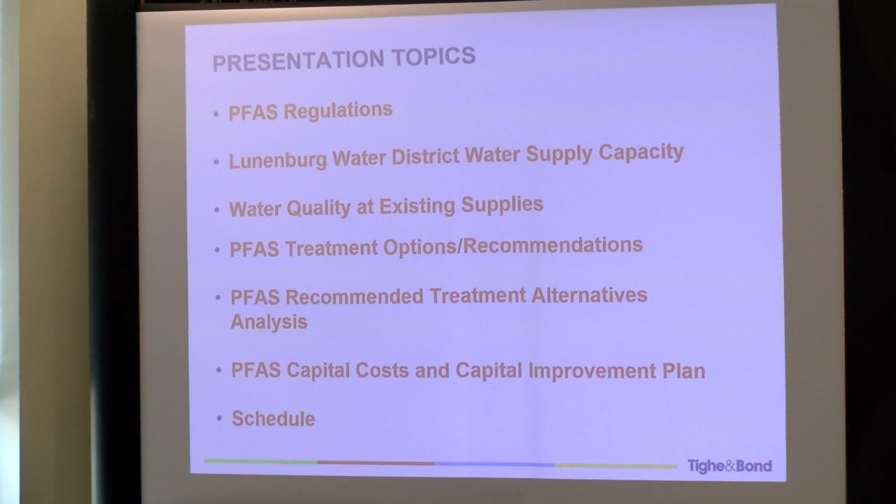So part of this presentation, we're going to just briefly touch upon a couple of these topics. The emerging PFAS regulations, what's going on with the district's water quality, capacity and water quality of each of their supplies, review the different options available for PFAS treatment, some recommendations for PFAS treatment. We'll go through our treatment alternatives analysis, and at the end we'll have the capital costs and the recommended plan and a potential draft schedule.

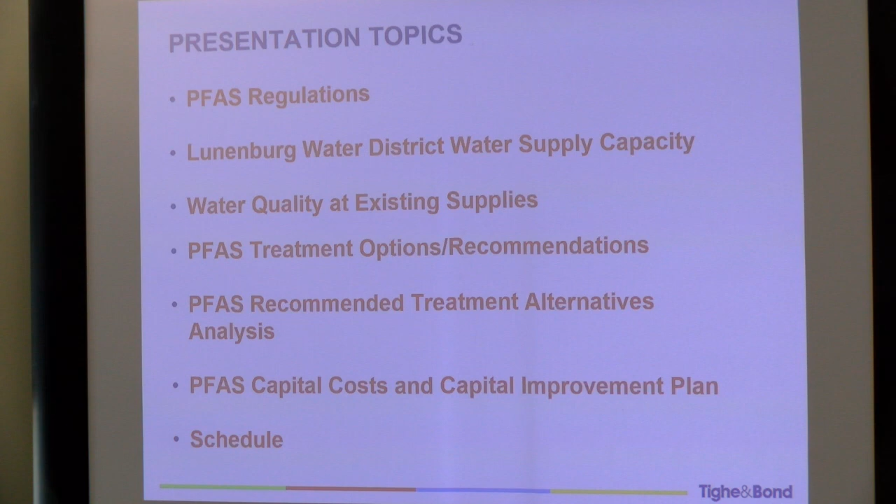So PFAS in drinking water, what is it? It's an acronym. It stands for a family of chemicals, thousands and thousands of different chemicals. Recently, the US EPA has enacted draft legislation that would establish an MCL for various individual compounds. The highlights are PFOA and PFOS in the middle of the table there, establishing a 4 parts per trillion limit, which is a very low limit.

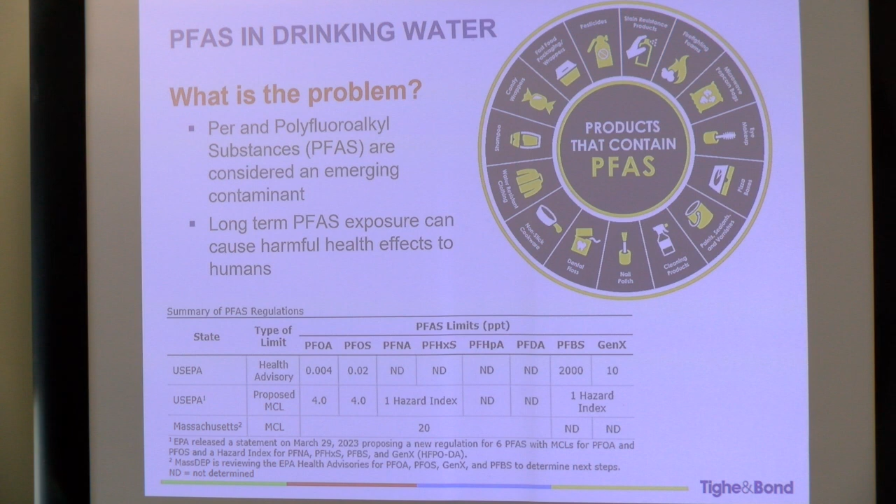Currently, Massachusetts has a limit of 20 parts per trillion, and that's for a combination of the different compounds above that number 20. So if the federal MCL gets finalized, PFOS and PFOA would have individual limits of 4, which is important for the district to pay attention to.

Just a brief history of what's going on in the district. It was established in 1939. It currently has 6 water supply wells, 4 of which are located at Lancaster Avenue of varying capacities, which we'll go into a little bit later on. There's the Hickory Hills well, and then the Keating well, which is their largest source. There's over 50 miles of main distribution system throughout the district, ranging in diameter from 4 inches to 16 inches. Approximately 2,500 customers. Estimated population served is around 7,100.

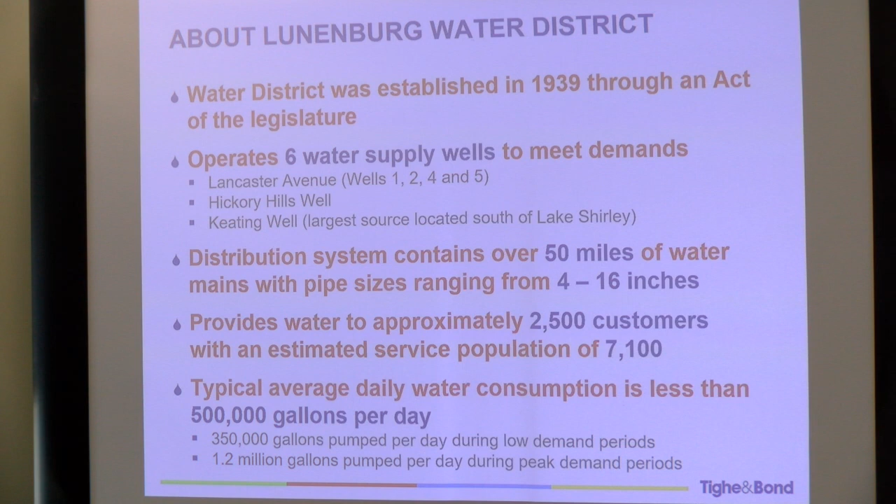On average, the district uses 500,000 gallons a day. That can be lower in the winters, 350,000 gallons, or during the summer's high demand periods, it can go up to 1.2 million gallons a day. The district operates under a Water Management Act permit, which establishes an average usage of 540,000 gallons per day, 0.54 million gallons. So you can go above this, but on the average for the whole year, the permit is 0.54. That can be increased, but there's a permitting process that establishes the need and the mitigation to increase that amount.

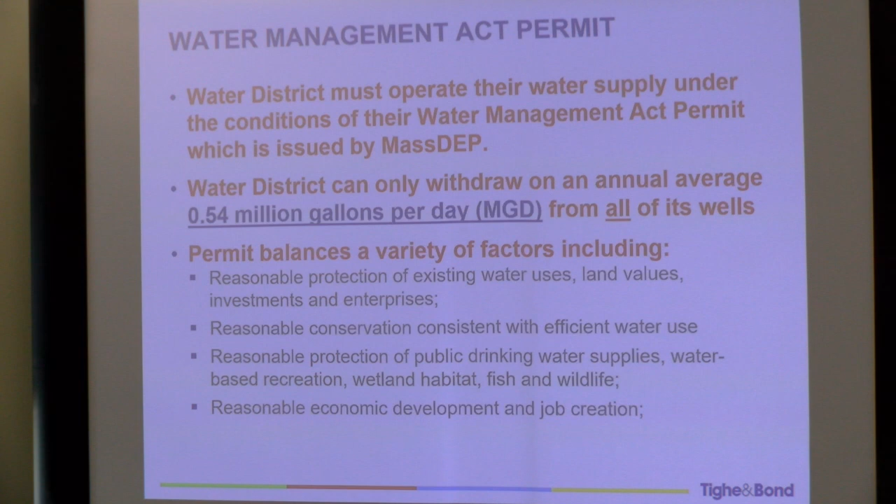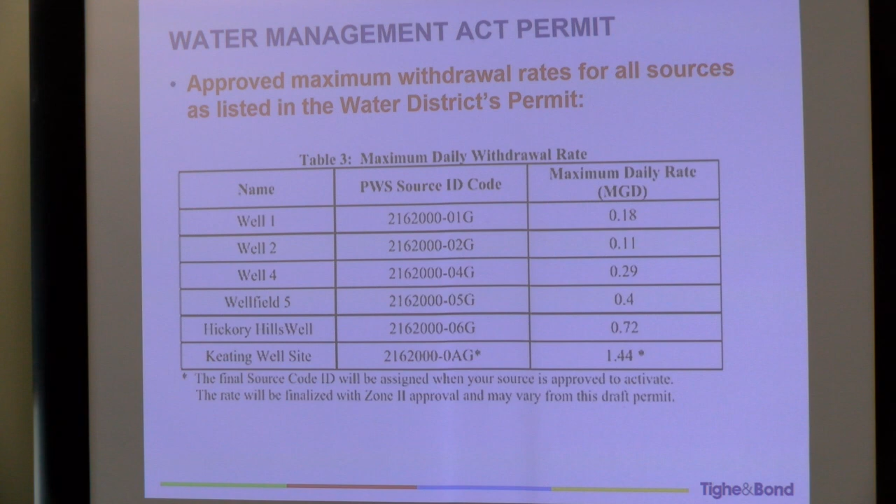Brief overview of the different well supplies that the district operates. These are all the approved operating rates. At the bottom, you can see that the Keating is the largest capacity, followed by the Hickory Hills well. And then you've got 0.4 all the way down to 0.1, depending upon which well over at Lancaster Ave. Why is this important? Well, what you want is a system that can meet average max day demands with the largest source offline. Currently Hickory Hills is offline due to water quality concerns. It was taken offline back in 2012 due to elevated levels of manganese, and we'll talk more about its water quality in a couple slides.

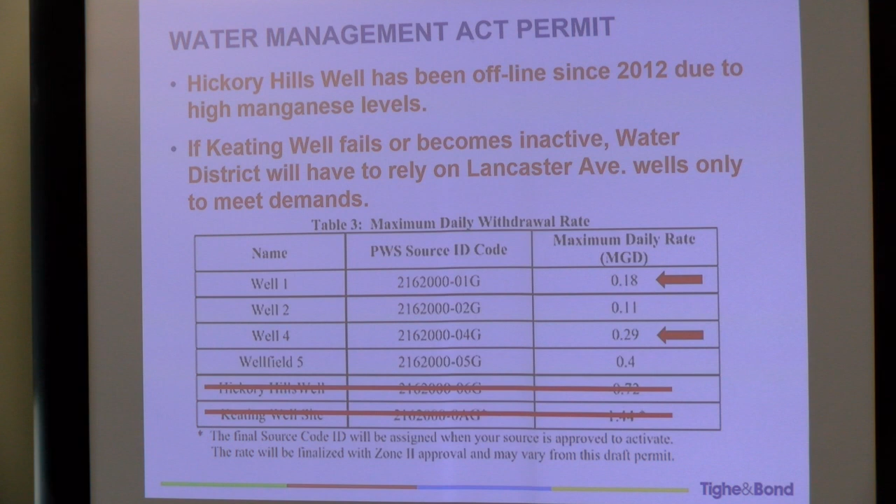So if Keating were to go offline for any reason, that limits you to Lancaster Ave to supply the whole district. Now individually you add them all together, it can handle average day demand, but wells 1 and 4, which have the red arrows next to them, were highlighted in that they really wouldn't be able to sustain those pumping rates for much more than a couple of days. So that further limits the available amount of water. So if Keating were to go offline in a peak summer demand scenario for a prolonged period of time, more than 2 or 3 days, you wouldn't be able to keep up with demand.

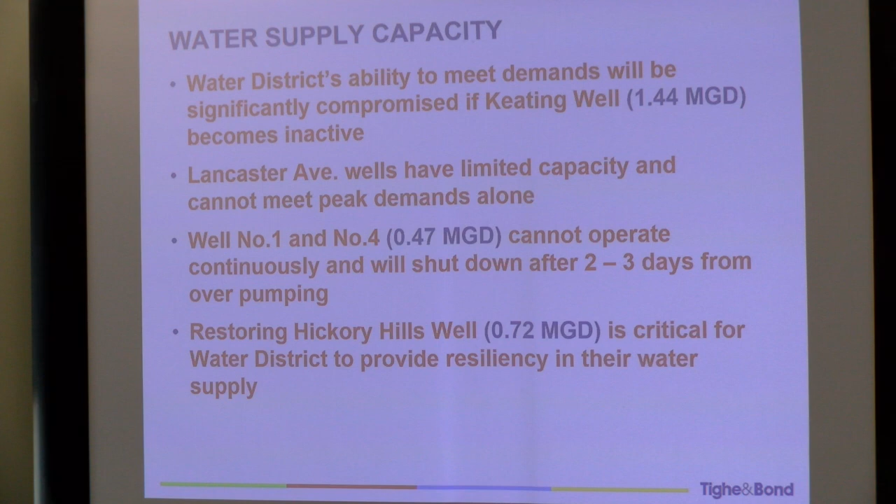So I guess what this is really trying to tell us is that it highlights the need for redundancy and resiliency in the system that Hickory Hills can help provide. So if Keating were to go offline, the district would be in much better shape, sharing the burden of all demands between Lancaster and the Hickory well.

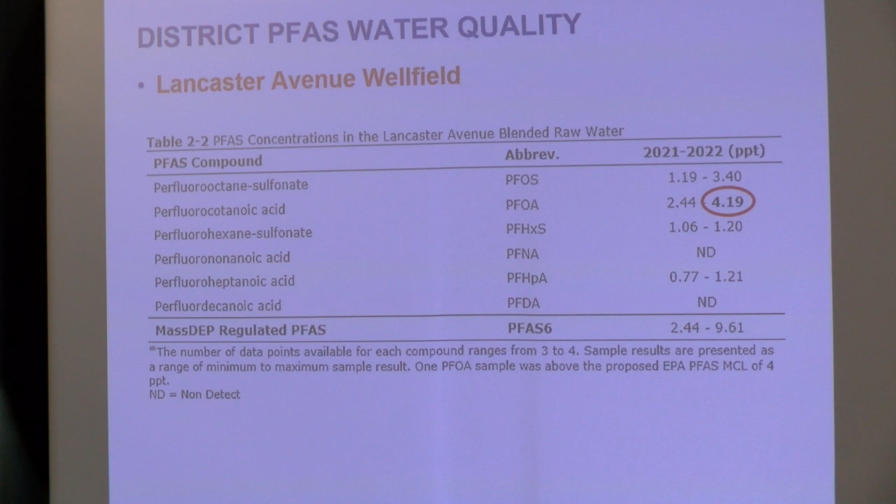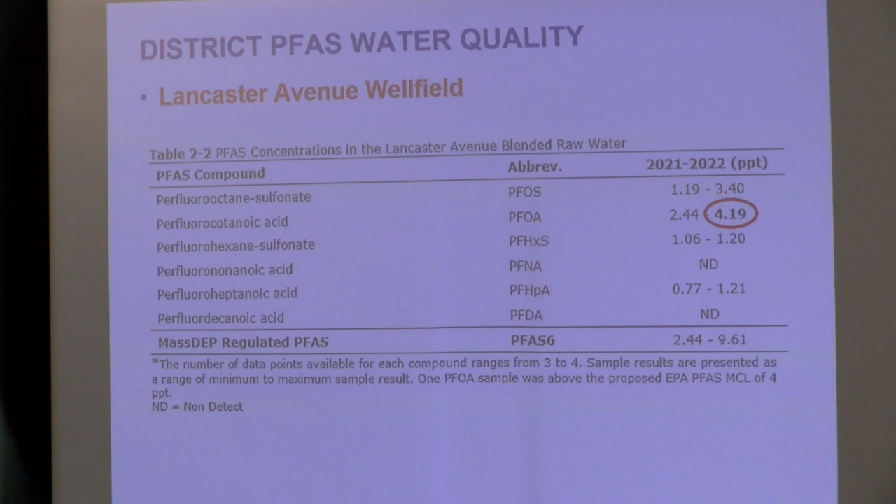Touching briefly on the water quality that has been sampled at each of the sources. I mentioned that 4 parts per trillion new MCL that the EPA has drafted. It has not been finalized yet, but it has been published in draft form. We don't know when it will be finalized. They keep pushing the date off, so we'll stay tuned for that. But there has been sampling that shows the PFOA from Lancaster Ave is above that MCL, circled in red.

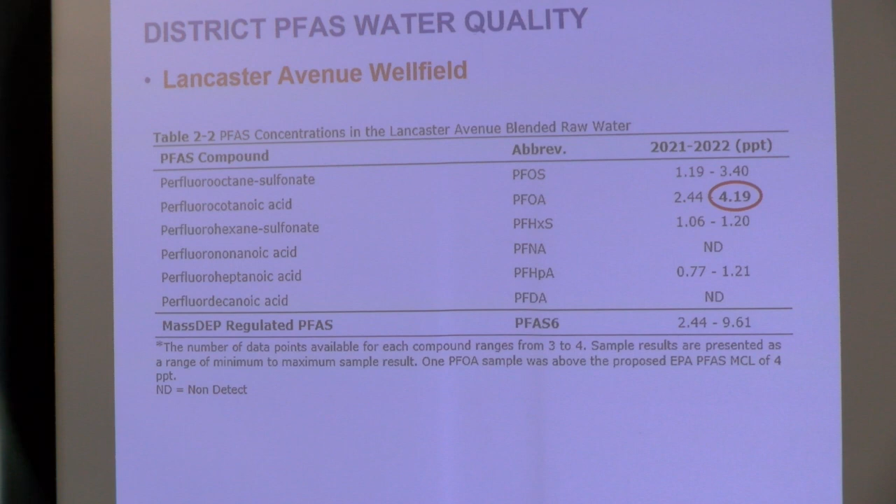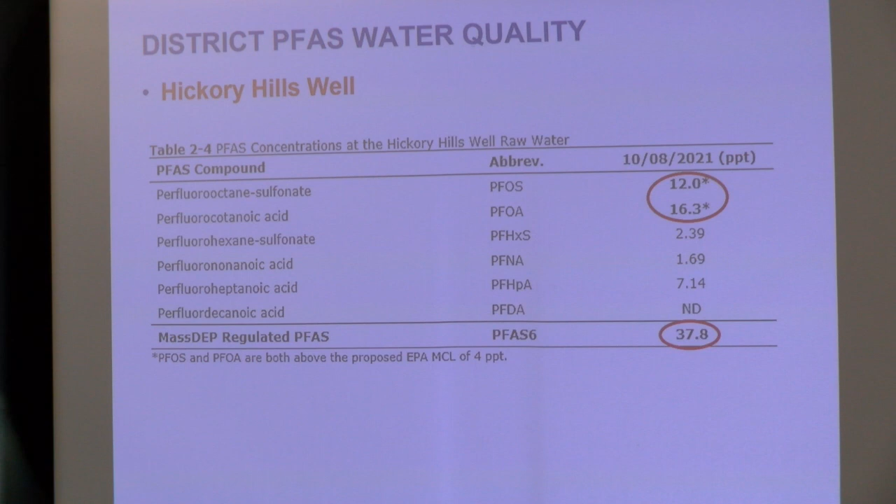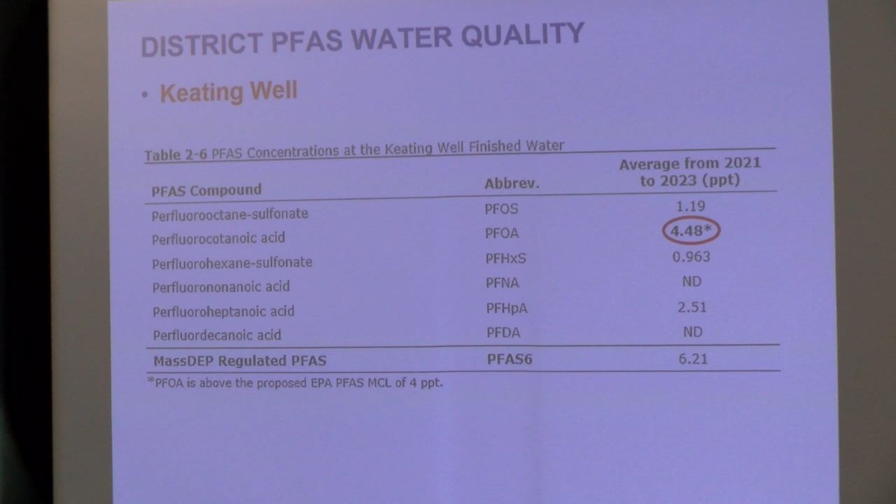Hickory Hills well is currently above the Massachusetts regulations of 20 parts per trillion. So to bring that well online, it would require treatment for PFAS. In addition, both PFOS and PFOA individually are over the proposed EPA MCL of 4. And finally, at the Keating site, similar to Lancaster, it is above the EPA MCL for PFOA. So if these draft regulations become final, it's going to impact all of the district sources.

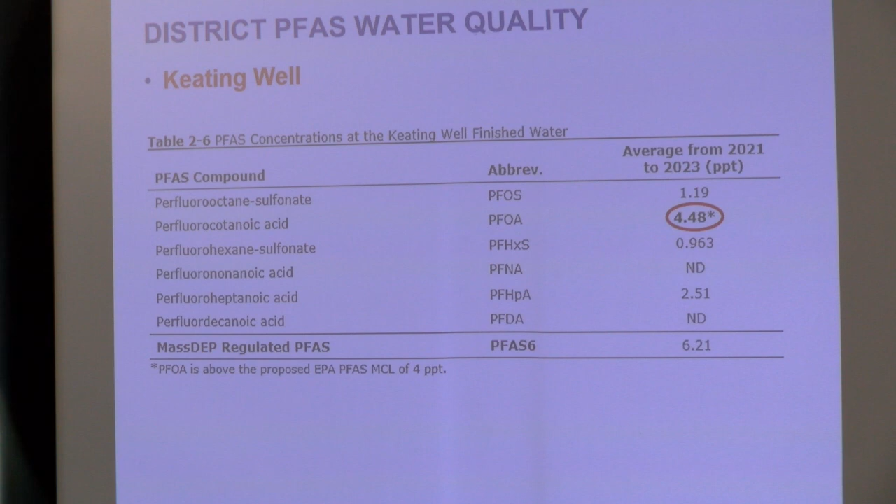So we took a look at the different treatment options available to the district for removing PFAS from their water. Granular activated carbon, GAC, and anion exchange are the most prevalent and widely used right now. They're both effective, they're both in use, they're both approved by Mass DEP and in operation in Mass. There are pros and cons to the different types of media.

GAC in general can handle maybe the longer chain compounds a little bit better than the short chain, where ion exchange can shine. But they both have pros and cons, and it depends on the water quality, and we typically run pilots to determine whether or not it's going to be the right type of media for that water.

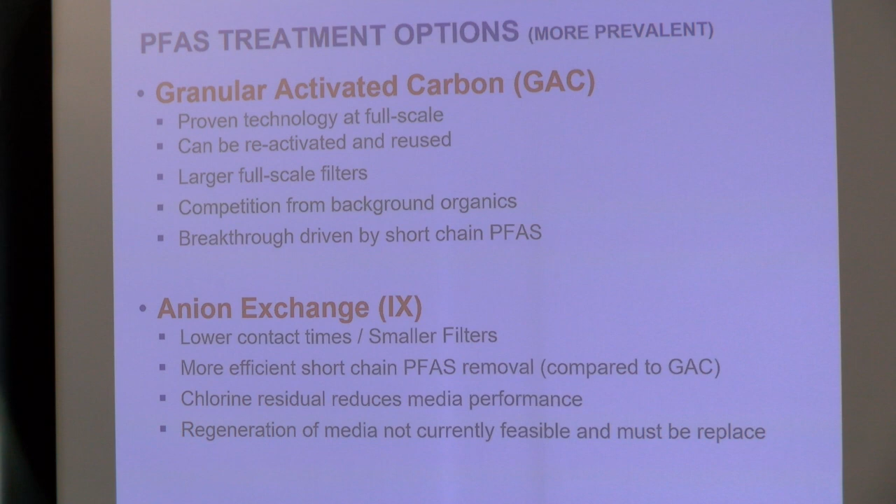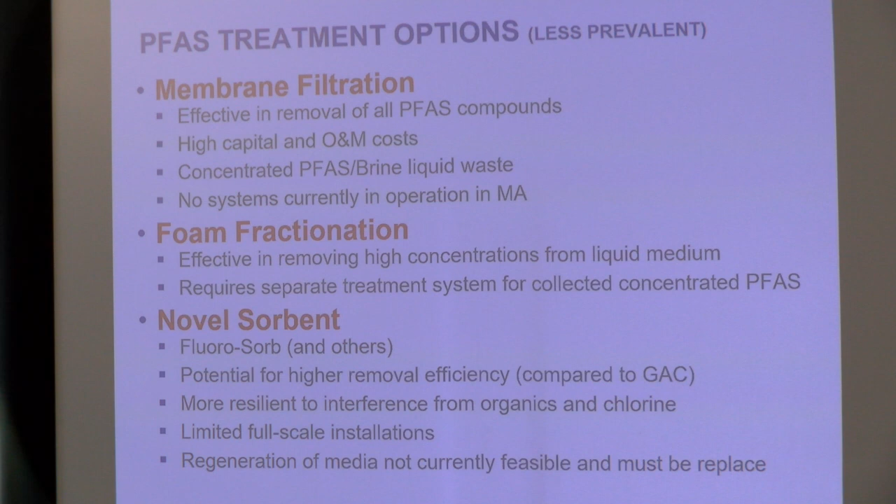The master plan also goes into what is the alternative to treating PFAS. We looked at what happens if you continue without treatment. Right now, without new PFAS regulations, there currently exists a capacity concern. The district doesn't have the redundancy it needs with its largest source offline. However, if PFAS regulations are finalized, then all of the district sources are impacted. So we don't really see this as a feasible option.

You could purchase water from somebody else. The district has looked at purchasing water from their interconnection. This was done when evaluating whether or not to proceed with the acquisition of the Keating supply. That was reviewed, the cost analysis completed.

It was determined to be more expensive than going with their own source, as well as it puts the control of how much you get charged for water completely out of your hands. So you're kind of at the mercy of the community that's selling you the water. So you really don't have control over that. So that wasn't a very desirable option as well.

To develop a new source, we develop new sources from time to time. However, this is a very long process. The permitting is extensive, and it requires the district to own the property, control what impacts the water supply.

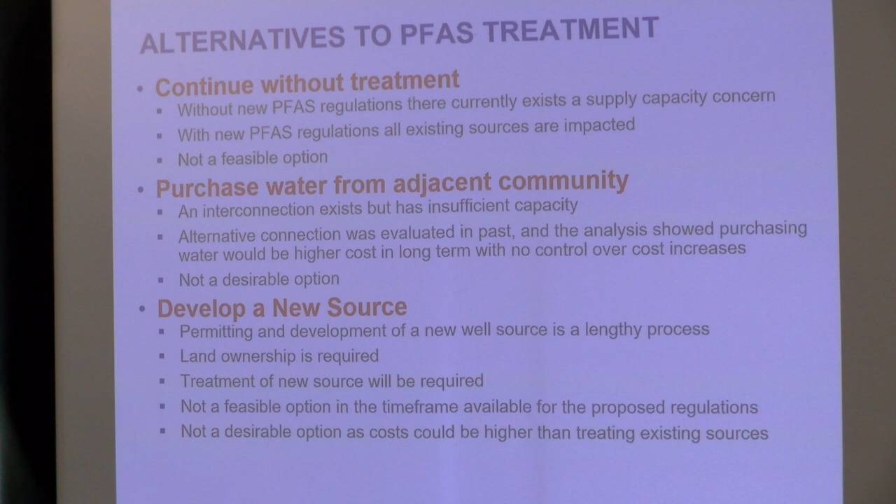So looking at each source in terms of PFAS recommendations, Lancaster will need treatment if the EPA MCL is finalized. There are low levels of iron and manganese in the water at Lancaster, and we would recommend that those be addressed to remove iron and manganese prior to PFAS treatment.

In most cases, pilot testing has shown that without removal of these, it reduces the life expectancy of your PFAS treatment media, which is your most expensive media that you're going to have to replace periodically, and you want to prolong its life as long as possible. So it's recommended that the iron and manganese is addressed.

Very similar story at Hickory Hills Well, except that it's currently over the Massachusetts MCL. It's also got high manganese, which is above the health advisory that Mass has for it. So it would require iron and manganese removal prior to PFAS treatment as well. Currently, pilot testing is ongoing for iron, manganese, and PFAS at the Hickory Well.

The Keating Well site, similar to Lancaster, would need PFAS treatment under the proposed MCL. There is high hardness at the Keating Wells in addition, so we would be looking at that in the pilot study too, to address the high hardness, to make sure that doesn't impact the PFAS treatment as well as address the ongoing maintenance issues that it is currently causing the district.

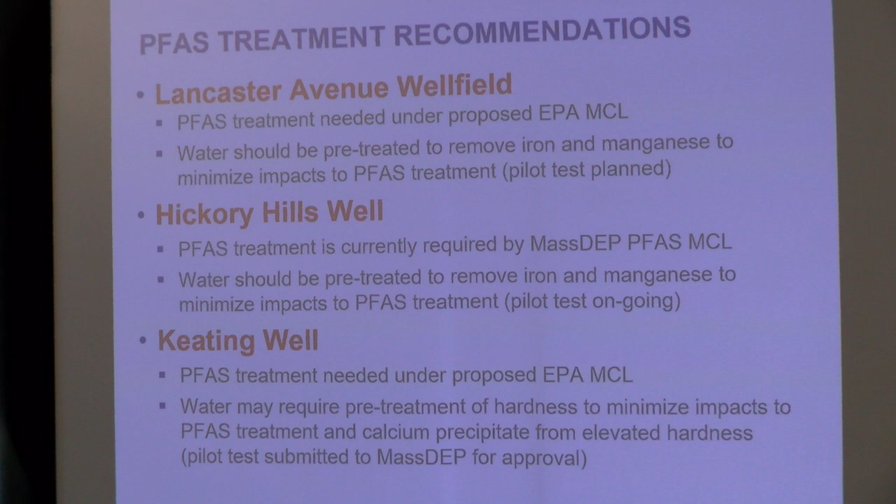So establishing what sites need treatment, we took a look at how we would address treatment for the whole district in an organized manner. So we looked at it a couple different ways. We looked at a fully decentralized treatment option, which basically means you put a new treatment system at each well. It would maintain a good resiliency, but it would be the highest capital cost and highest O&M cost as you'd be maintaining and operating 3 separate treatment plants.

We looked at the centralized treatment, so basically treating all of the district sources in one location. That has the potential to be the lowest capital costs and O&M costs. However, it requires an extensive amount of raw water transmission main, and it's also the least resilient option. If something were to happen to that treatment plant, then the district has no water available for the whole system. So it's going the wrong way in terms of resiliency and redundancy.

And it has the potential to be the most complex because we're blending 3 different sources, so we need to address the water quality needs of all 3 different sources in one location. So that could mean a more complex treatment plant.

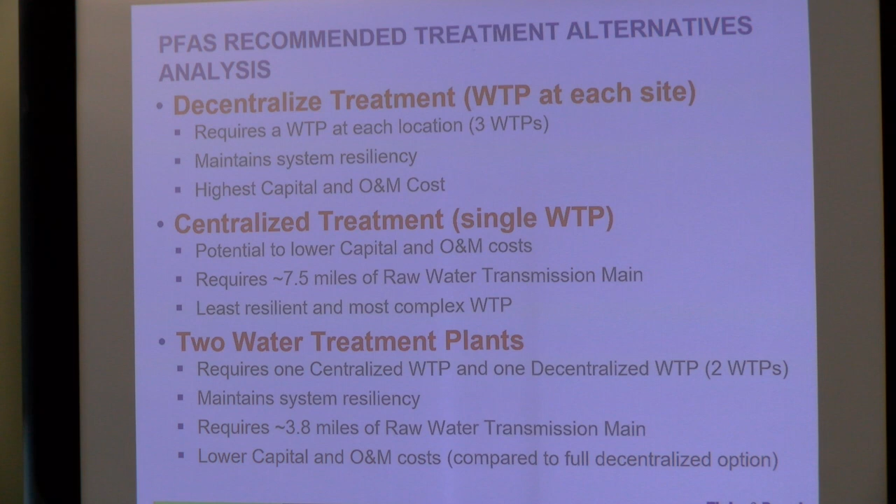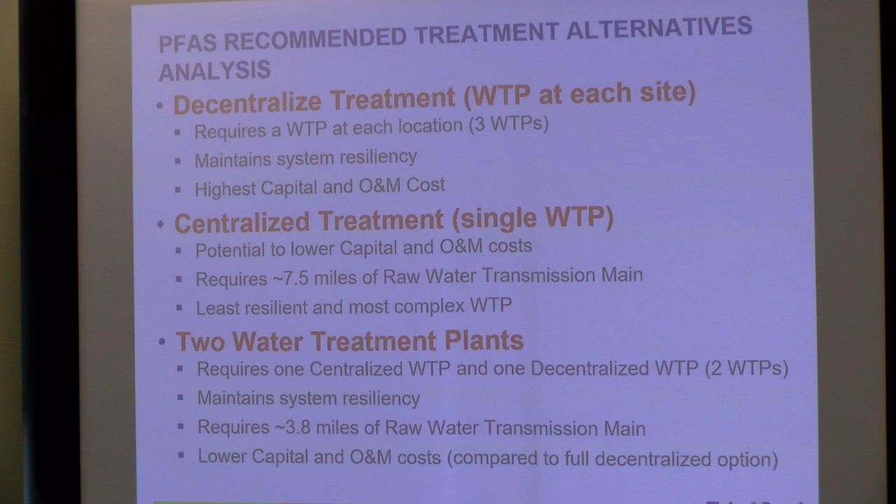So then we looked at an approach that was kind of in between these two, where we'd have 2 treatment plants, one that would treat the water from 2 wells and one that would stay decentralized. To do that, we would need just under 4 miles of transmission main to get one of these sources to the other site. And it would also lower capital costs and O&M costs when you compare it to building 3 different treatment plants at 3 different sites.

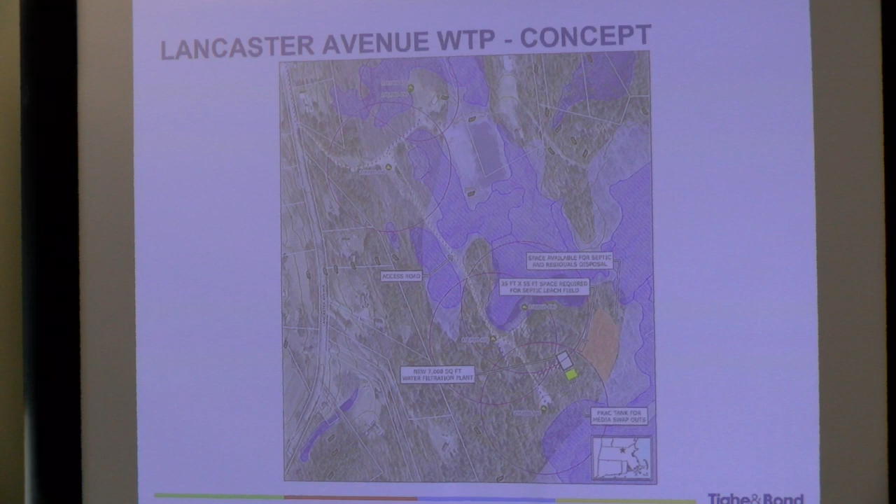So what does it look like at Lancaster Avenue? We overlaid where we might place a treatment plant at Lancaster Avenue. At this scale, it might be tough to see on the screen, but this is Lancaster Avenue. All of those magenta circles are the zone 1s for each of the wells. We don't want to put certain things in the zone 1; we're not allowed to put certain things in the zone 1. We also take a look at wetlands. Where are the wetlands?

Where are the flood zones? So that limits us to where we want to put a treatment plant, because the treatment plant has certain building systems that require different things. Recently, Massachusetts enacted a new plumbing code that requires bathrooms even at unmanned pumping facilities. So that was a recent addition in December that we have to contend with.

So we want to make sure that we're in a location where, okay, if we had to put a septic system in, is there land available? So the brownish blob on the lower right is an area where it's outside the zone 1s, it's outside the wetlands, it's out of the floodplain. So there is some land available where if we needed to put in a septic system, the land is available there.

We're looking at roughly a 7,000 square foot building in terms of developing costs for this type of facility. And we're also looking for laydown next to the building. So when you have delivery of, say, if you go GAC carbon, you need temporary frac tanks there so that when you swap out the media, you take the old ones out, put in a frac tank, haul off site. New media shows up in a frac tank, it's pumped into the facility, so you need some room to move around and swap the media out.

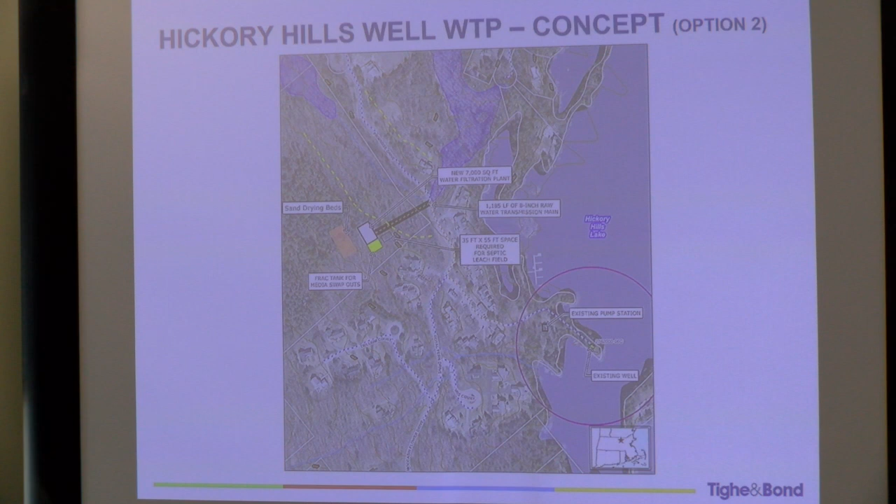Over at Keating, similarly, we have the zone 1 there. It's just a single well out back. And for this treatment plant, we're not looking at the need for backwashing since we're not treating iron and manganese here. So we don't really need as much space for it. We do need to capture the brine from the softening system that we might have to use to soften the water. But aside from that, still we're looking at roughly a 7,000 square foot building, but different equipment that would go along with this one.

We try to reuse a lot of the existing infrastructure there, where the existing pump station could still act as the final pumping station out to the distribution system. So we just kind of intercept flow between the existing well and the existing pump station, treat it, and then it would go out to the system.

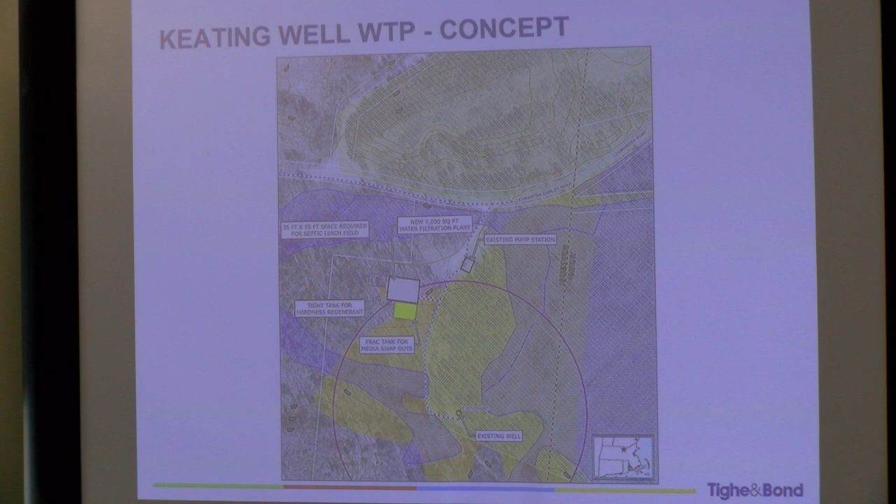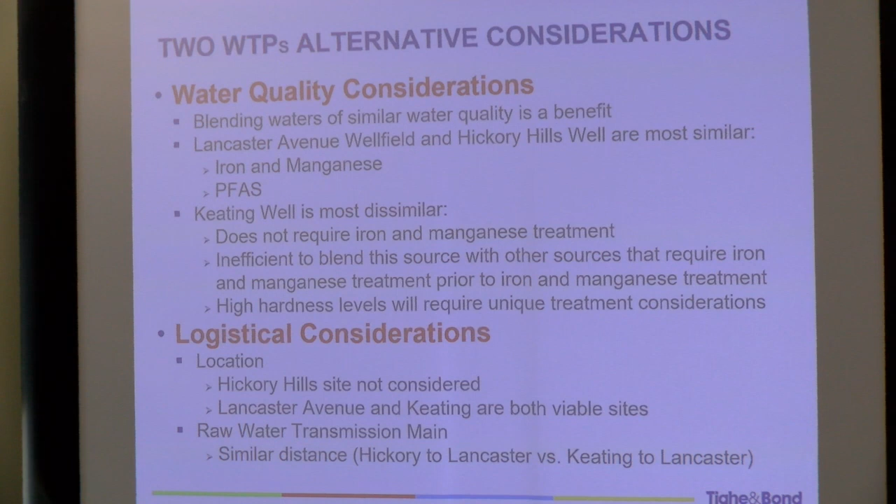So when we started looking at the option of centralizing 2 of these treatment plants, we looked at a couple different things that would make our lives either more difficult or less difficult. And the 2 main things are water quality, and then there's a few logistical things. So under water quality, you want those 2 sources to have similar water quality, so that the treatment system that you'd use for both wells is as similar as possible.

Lancaster Avenue and Hickory Hills well are the most similar when it comes to iron, manganese, and PFAS. Keating is the most dissimilar. It has no iron and manganese, so blending it with another source that needs iron and manganese treatment is not an efficient process. You'd probably want to keep it separate. It adds complexity to what you would do to treat any of those other 2 that were to blend with Keating.

And the high hardness would still have to be addressed, and that's a unique thing to Keating. Then there were logistical considerations. Location. Hickory Hills site was not really considered as a site to centralize a treatment plant, as it had the most issues and least available area.

So we took a look at Lancaster Avenue and Keating, which both had plenty of room to put a centralized plant. And then we took a look at raw water transmission mains, and we saw that it was very similar distances from Hickory to Lancaster as it was from Keating to Lancaster. So there wasn't a big difference there either.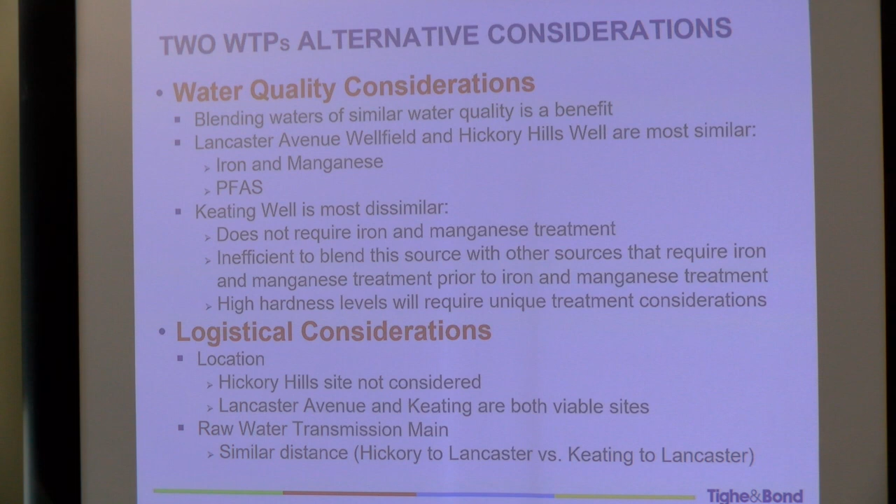So from a water quality and location perspective, it really seemed like Lancaster and Hickory had similar water quality and not a huge difference in transmission main, which this kind of summarizes there. So the recommendation is to combine Lancaster and Hickory. And the proposed site is at Lancaster Ave. It's got more space available to it.

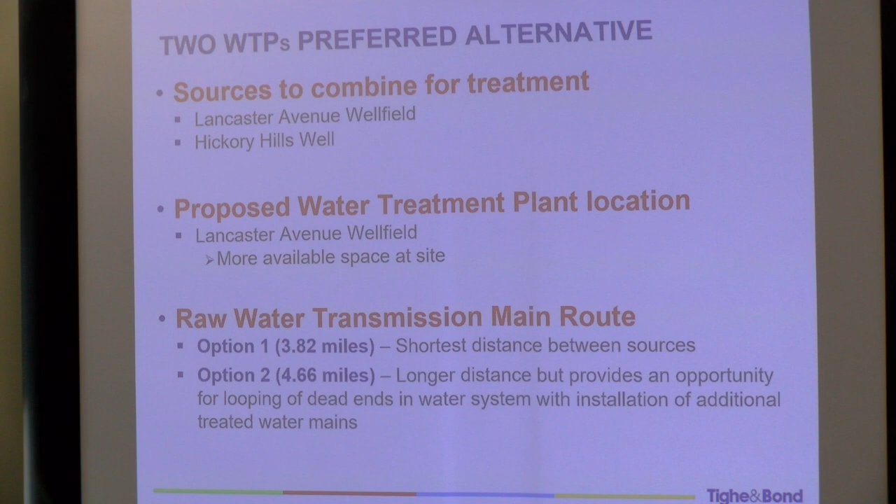So when we started looking at that, how do we refine how you get between Hickory and Lancaster? And there's a couple of different routes you could take through town to get there. One is the shortest distance, just travel over the roads through the shortest distance possible. The other option takes an alternate route. It is longer, but it provides the opportunity that while you're at it, maybe you loop part of the system to help with some water quality and circulation as you go. You could even expand to new customers.

So what does the centralized treatment plant look like over at Lancaster Ave? It looks very similar to the other figure that I've shown you, except we're showing that the building is roughly 12,000 square feet, accounting for larger filters and additional tankage that we required when you're treating roughly double the flow.

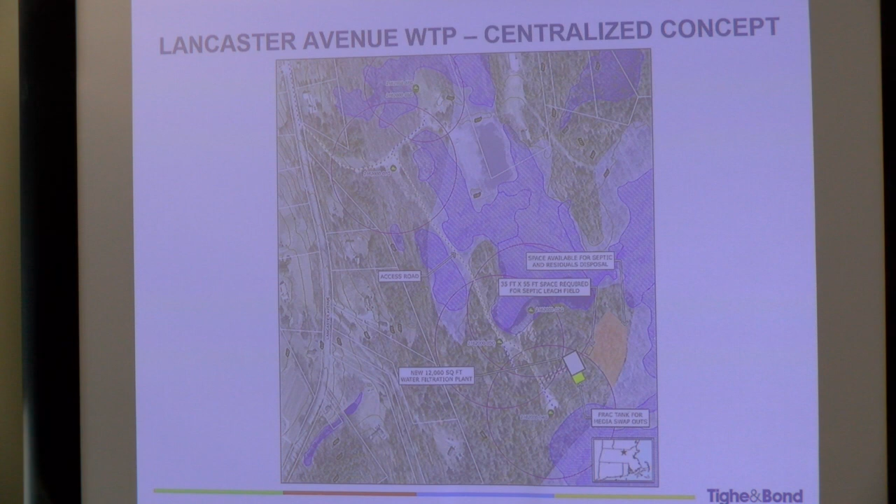Option two takes the other route through town, and what this does, it allows the district the opportunity to loop the system between a couple of long dead ends. So there's roughly 6,400 linear feet of this route where you could install a couple of pipes so that you would loop the system. So it adds a significant amount of pipe to the project. It is a consideration because it does drive up the costs quite a bit.

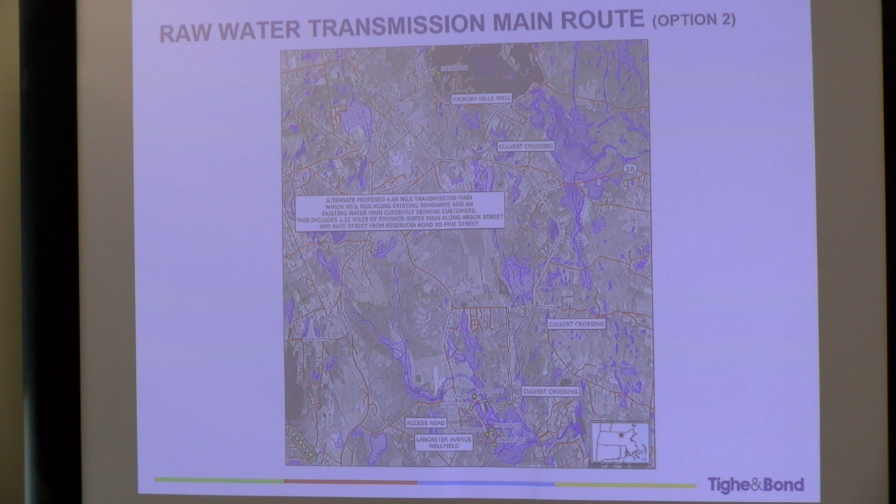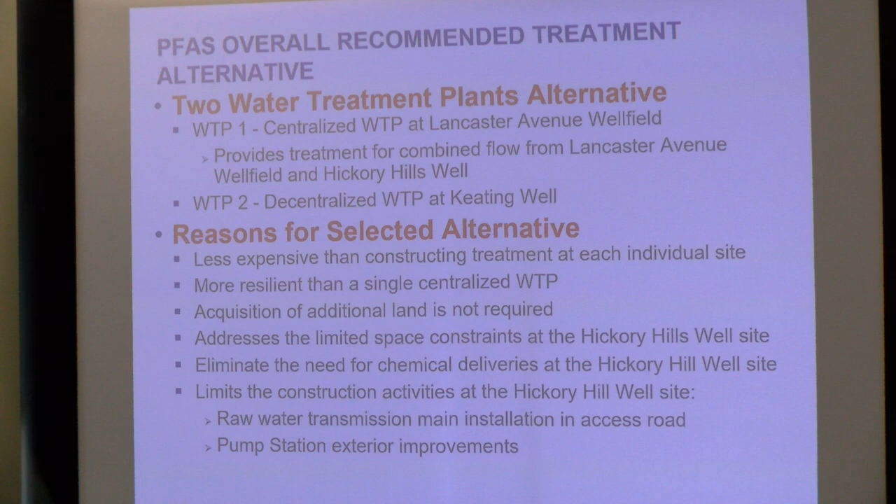So in the end, what the two treatment option really looks like is one treatment plant at Lancaster Avenue that treats both Lancaster and Hickory, and then one at Keating Well that treats just Keating. And the reasons became it's less expensive to construct than a treatment system at each individual site. It's more resilient and redundant than just a single centralized treatment plant. We don't have to acquire any land to do this alternative. It does help address the limited space concerns over at Hickory Hills Well site.

And on top of that, it would eliminate chemical deliveries to Hickory Well. You wouldn't need to do those anymore. It will also limit the construction activities down at the limited space you have at the Hickory Hills site. They would be limited to basically a raw water transmission main to get the water to the Lancaster Ave site. You'd still probably want to do a couple of pump station exterior improvements while you're at it, but all in all, very minor.

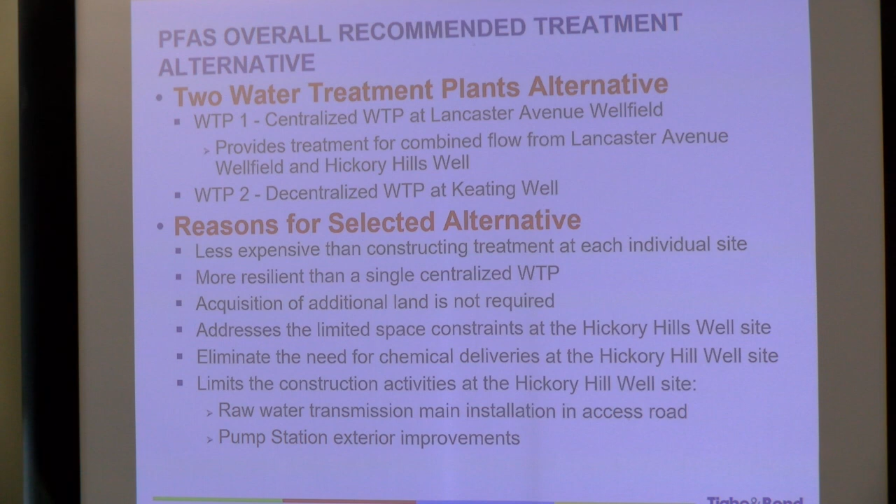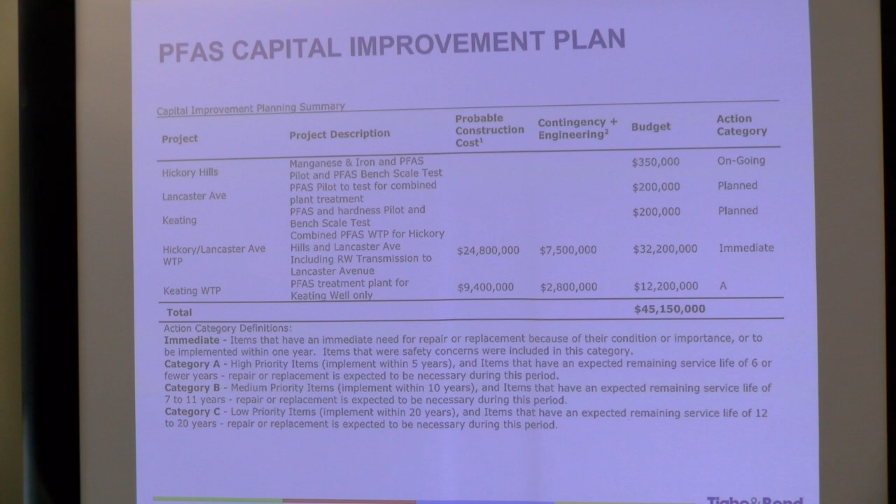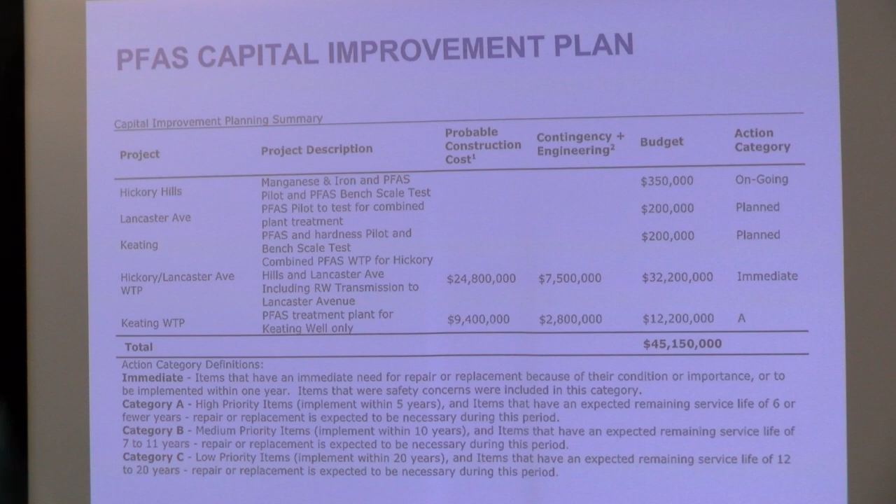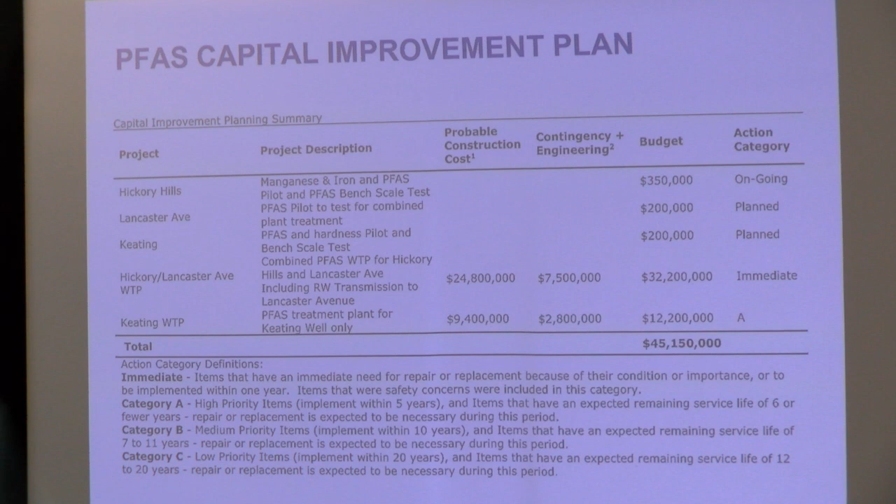This table summarizes some of the ongoing efforts and planned efforts and some budgeting numbers for the option. So at the top we have ongoing piloting at Hickory Hills. After that, we would need to do piloting efforts at Lancaster Ave and Keating, so those are both planned. And then for the combined treatment plant, there is a budget figure that we've included, which includes the transmission main across town. So total budget all in would be just over $32 million for that option. The Keating plant, by itself, would be just over $12 million.

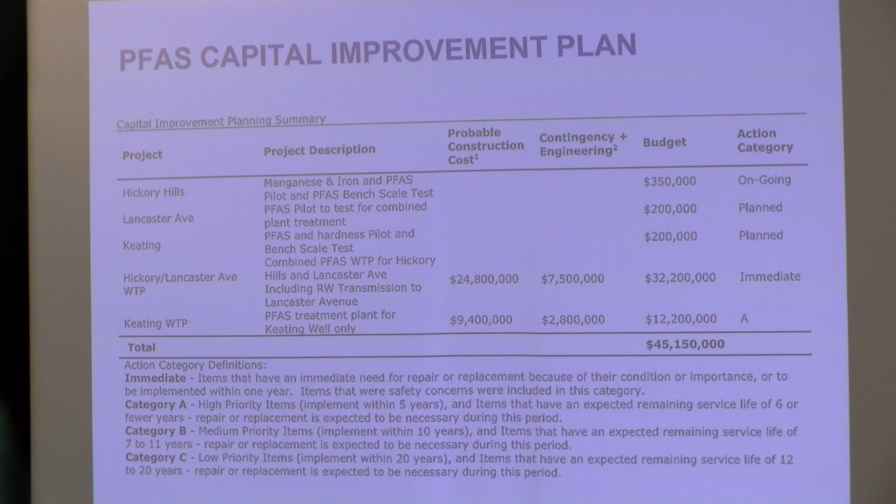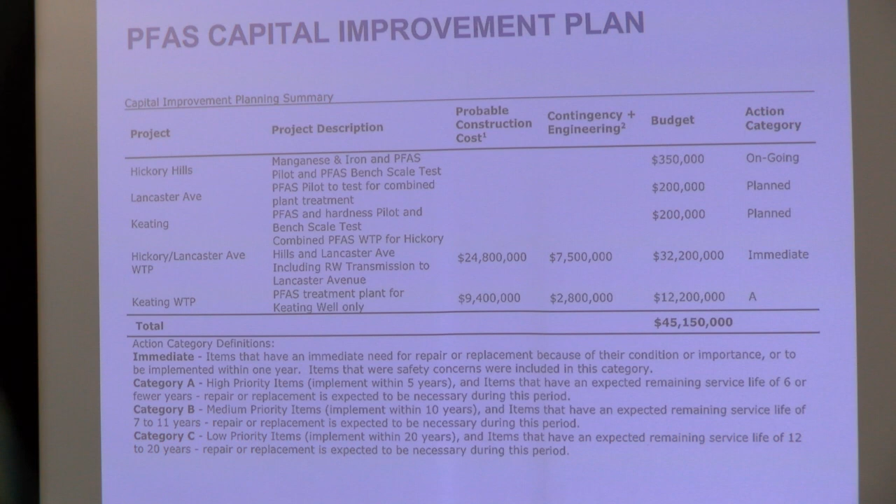So we recognize these are significant costs, which is why I think the district was wise in their application to the DEP SRF program for these types of projects. They provide both 0% financing as well as the ability to gain some principal forgiveness. So it really helps with the financing of these.

In terms of scheduling, there's a lot of dates that you've got to pay attention to when it comes to SRF financing. They usually come in June and October, and then they throw a curveball at you in August when you need to apply for more funding. But the next deadline that's up there for the district is to appropriate, take a vote to agree to borrow the funding for the treatment plant that's currently on the draft IUP for the Hickory site. After that, we would need to apply for additional funding for Keating to get the ball rolling there this summer in August.

Hopping back to the Lancaster Ave, Keating, Hickory site treatment process. If funding is approved, the next step is a loan application in October of this year. And then after that, it's back to June, where you have to have a contractor under contract. Why is that important? For the SRF program, without their express written consent, if you don't have a contractor under contract by that June 30th deadline, you are at risk of losing principal forgiveness on your loan. So that's why that date's important. And if for whatever reason, you just need to be in touch with them to make sure that you don't lose that option.

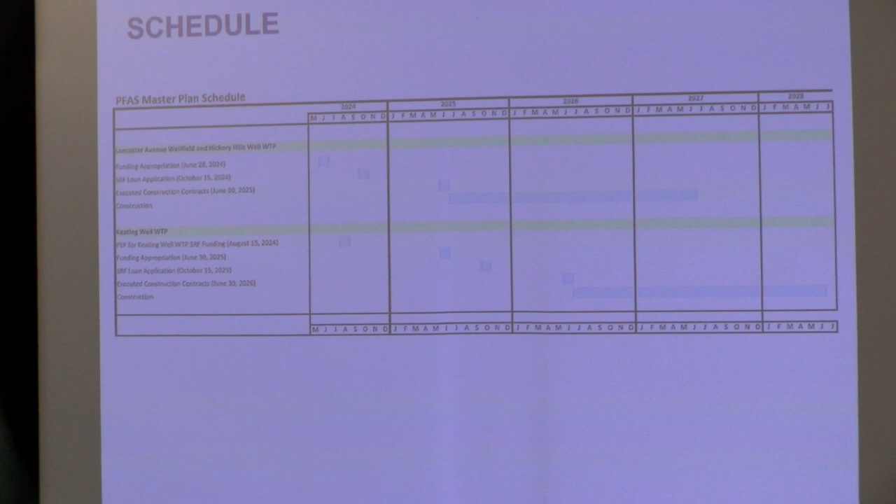And then these types of plants, right now, we're given schedules of at least 2 years. They used to be built in 1 year. Now, with all the delays in the supply chain and just everything, it just takes much longer. So these take around 2 years to be built once they break ground. All those dates were just put into a graphical display on this one for folks who can. And I broke it up by project so that it was a little bit easier to follow along.

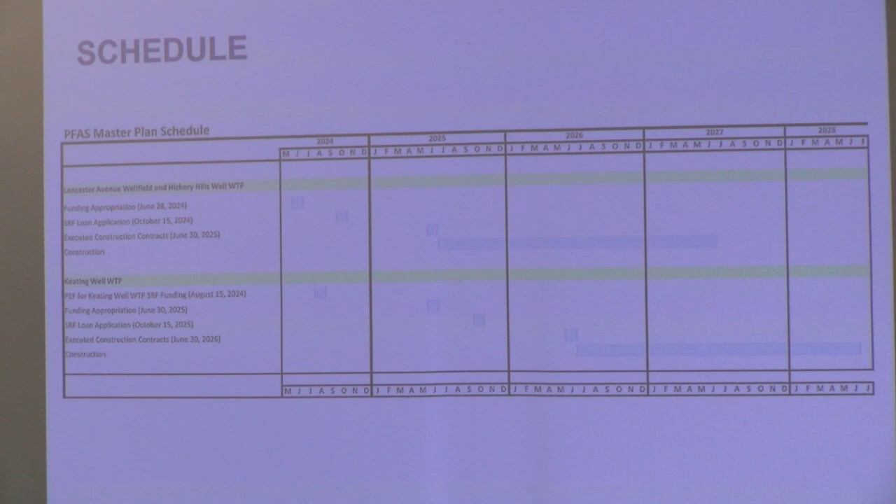That's the end of the presentation, but I'd be happy to take questions from anything that was discussed along the way. I'll go first. Sure, I've got a couple of notes here. Just for the people that are watching at home, they may not understand what a raw water transmission main is. Can you explain that a little bit?

Right. So what we call raw water is water that is fully untreated. It's what you pump directly out of the ground. So in our case, what we'd be looking to do is install a new pipe that conveys the untreated raw water from Hickory across town to the Lancaster site into our proposed treatment plant, where it will be treated and then distributed to the distribution system like it's currently done. So you might see, if that goes forward, a crew installing a pipeline that no one connects to. Correct.

And you wouldn't necessarily connect the same number of hydrants that you would on a traditional distribution main, but you might connect a few hydrants for flushing purposes, but these would be painted probably black with like "do not use" or stuff like that on them. Okay, thank you. Just for the layman's term there.

Why couldn't you use one of those hydrants in an emergency, like a fire or something? You probably could, as long as you had a good degree of coordination with the fire department, so they knew or understood where that water was coming from. Like if you're putting out a barn fire. Right, but you'd have to coordinate with the district because they have to turn the well on. Oh, okay. For what we're doing right now, if we went with option one, there's already hydrants along the way there.